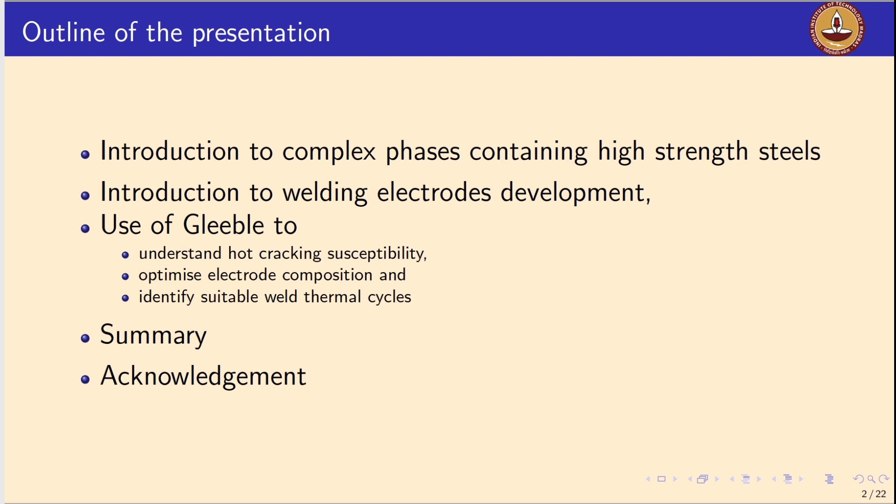So the high-strength steels we are actually discussing here contain an ultimate tensile strength beyond 1 gigapascal, right? And they also possess very good ductility for this strength level, about 10 to 15%, so that these steels can be made into components for applications like armor applications, automotive applications primarily for lightweighting, and shipbuilding. So the unique microstructure that the steel possesses makes these steels very attractive for high strength applications.

So for example, in shipbuilding these steels can be exposed to hydrogen containing environments. So the unique microstructure we see in this slide, the mixture of retained austenite and carbide-free bainite, is also known to have very good resistance against hydrogen, because of the increased interface boundaries as well as the presence of retained austenite, which can also store hydrogen in the microstructure so that the embrittlement can be delayed. So this microstructure becomes very attractive for high strength applications.

Moreover, the carbide-free bainite containing microstructure is also known to have very good ballistic resistance. So therefore, for armor applications, this becomes very interesting. Unfortunately, because of the high carbon containing microstructure, the other alloying elements which are needed to stabilize this structure are extremely important, and they also affect the weldability significantly. So in order to develop good welding electrodes, we need to understand how these alloying elements affect the weldability of the material. So therefore, the physical simulations become very critical, right?

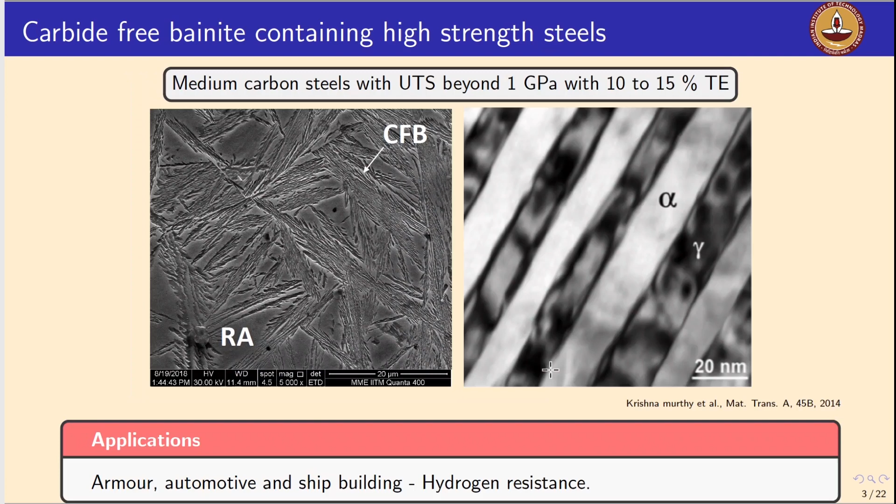So the addition of alloying elements such as silicon and aluminum is very important because these elements are known to suppress carbide precipitation during this bainitic holding. Right. Apart from silicon and aluminum, sometimes we also add phosphorus, because phosphorus can also give very good solid solution strengthening, and it can also suppress cementite formation. So this isothermal holding cycle is extremely important to get the carbide-free bainite containing microstructure. And so we also need to add alloying elements, silicon, aluminum, phosphorus with the carbon, so that we can stabilize retained austenite at about 10 to 15%. So this thermal cycle with alloying element additions is extremely essential to stabilize these microstructures, right?

But if you understand the welding metallurgy, these elements are very notorious for welding, right? The moment you increase these alloying element concentrations, we embrittle the microstructure, and we can also make the microstructure susceptible to hot cracking and cold cracking, and also we can stabilize unwanted phases in the microstructure.

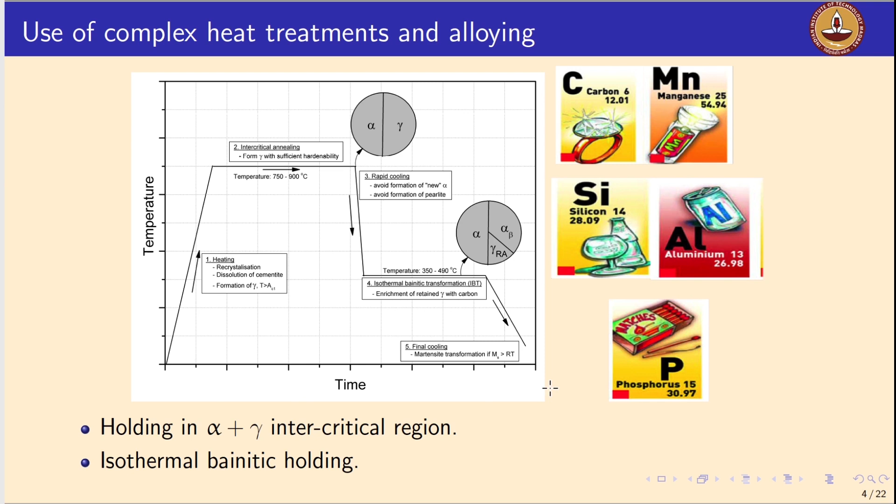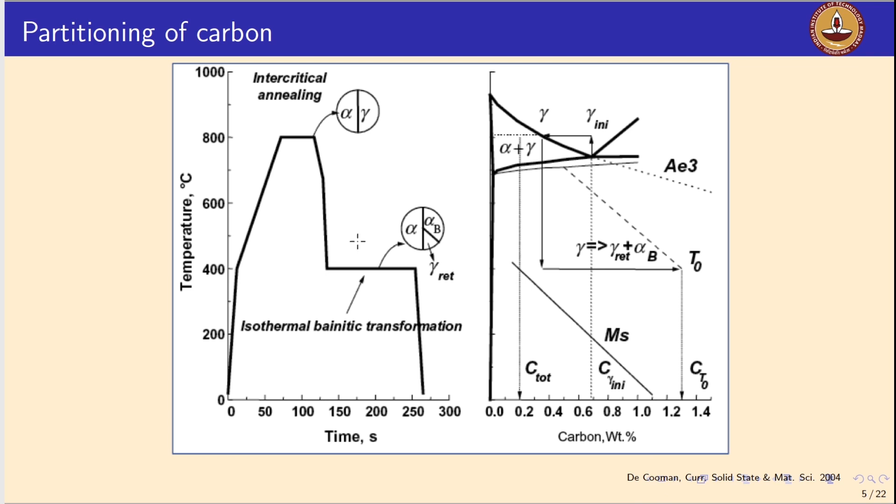So again, the partitioning of carbon is doing the trick to stabilize this CFB microstructure, the carbide-free bainitic microstructure. When we do an isothermal holding, we form the bainite enriched in supersaturated carbon, so that the bainitic ferrite strength can be increased. Subsequently, the suppression of cementite ensures that carbon is partitioned into the austenite, so that austenite can be stabilized when cooling from these bainitic holding temperatures. I don't want to go into detail about the partitioning because of time constraints here. You can also refer to some of the references I quote over here. Right, so the trick here is that the microstructure is stabilized by using this isothermal bainitic holding.

But if you look at a typical weld thermal cycle, we cannot do such a heat treatment, isn't it? Right, because the weld is actually cooled directly from solidification temperature to room temperature. So how do we stabilize this microstructure? What I showed you in earlier slides.

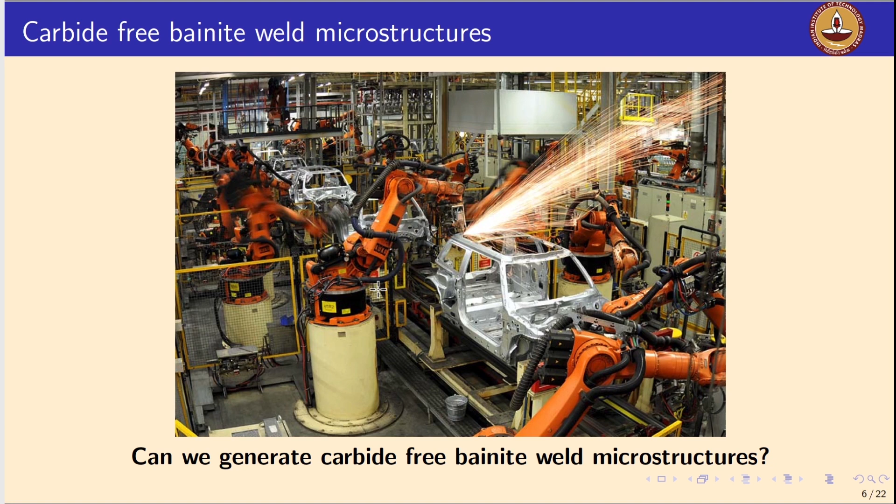So we'll have to play around with the cooling cycles and understand the phase transformation behavior when the weld pool is solidifying from the solidification temperature to room temperature, and whether we can manipulate these weld thermal cycles such that the weld microstructure can contain carbide-free bainite and retained austenite. So that's what I'm going to present in this talk.

So the primary welding processes we use to weld such steels are the flux-based electrode processes, primarily shielded metal arc welding or flux core arc welding. I'm going to present this lecture with respect to the development of electrodes for the shielded metal arc welding process. This process is also known as stick welding because the electrodes are made into a stick, right? So this electrode primarily contains a metal core, and the flux is added onto the surface of the electrode. The alloying elements required in the weld pool are added either into the metal core or in the fluxes in terms of ferroalloys. These fluxes and ferroalloys decompose and produce molten droplets from the melting of the electrode, and subsequently the molten droplets get transferred to the pool, and the weld pool solidifies. Based on the thermal cycle imposed when the weld pool solidifies, we may stabilize the microstructure.

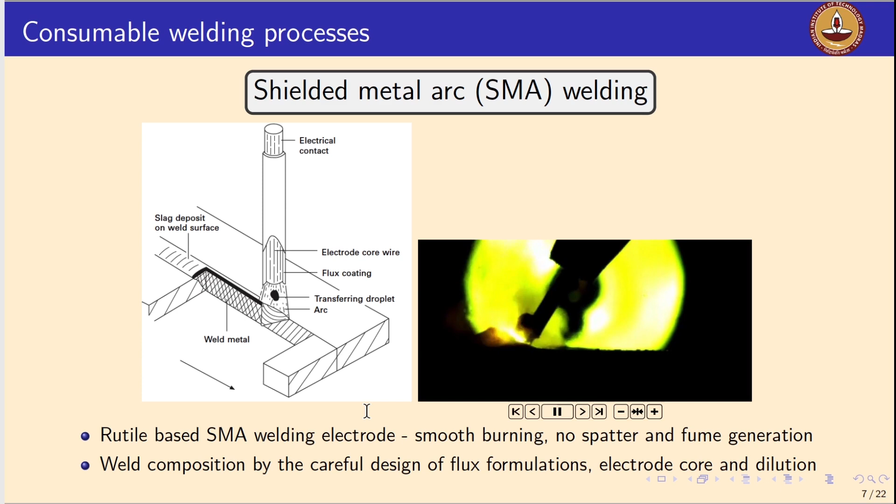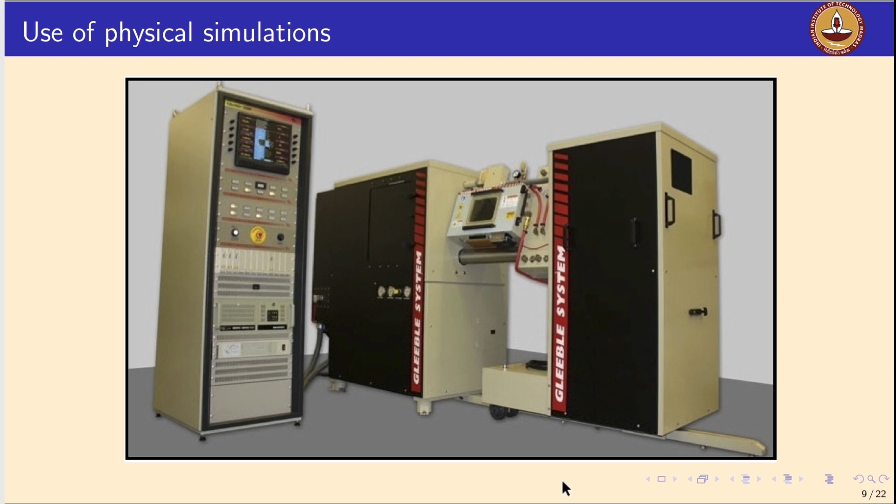So once we make these electrodes and we start producing the candidate welds to generate samples for the physical simulations, because immediately when we start depositing the welds, the welding thermal cycles are not optimized, right? So we generate the candidate welds, and subsequently we extract the samples from the candidate welds and carry out extensive physical simulation using Gleeble. Right. So the first simulation we carry out from the candidate chemistries is to understand the hot cracking susceptibility.

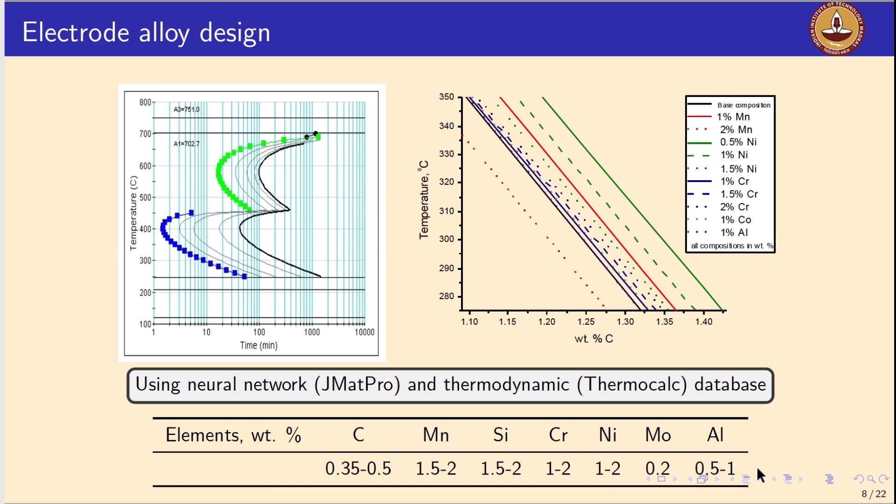Because if you look at the chemistries I showed you in earlier slides, this contains carbon of about 0.35 to 0.5. So if it is 0.4% carbon, the material is already highly susceptible to hot cracking. And apart from the carbon, we also have high manganese and chromium, for example, and some amount of phosphorus and sulfur as well from the fluxes we add. And those chemistries are notorious for hot cracking. So if you don't control the alloying elements in the weld, we end up just producing a cracked weld.

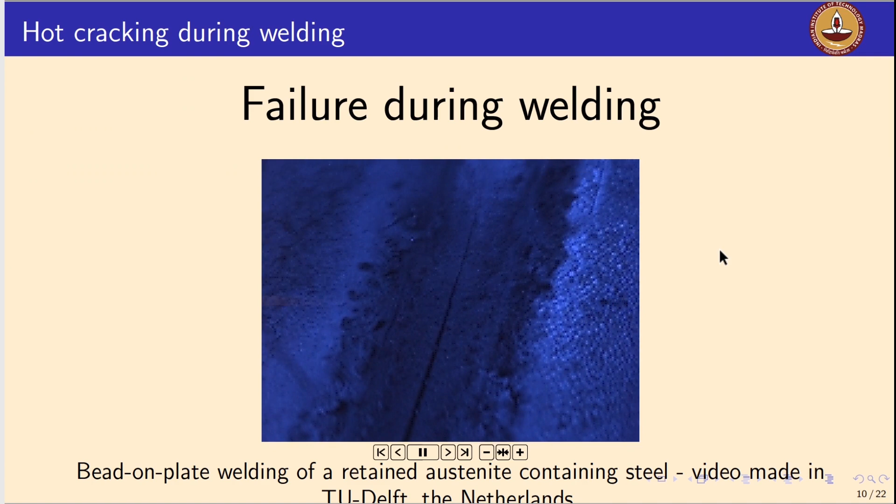So therefore, we have to identify, with the identified chemistries, what compositions can give us welds without any hot cracks, right? So how do we understand the hot cracking susceptibility? We can look at the in situ microstructure during solidification, right? We can also use laser confocal microscopy, where we can visualize the solidification of the weld pool. This is a very expensive affair, right? There we can see the actual solidification of the weld pool and see whether backfilling is happening during solidification, where the liquid can backfill and arrest the crack.

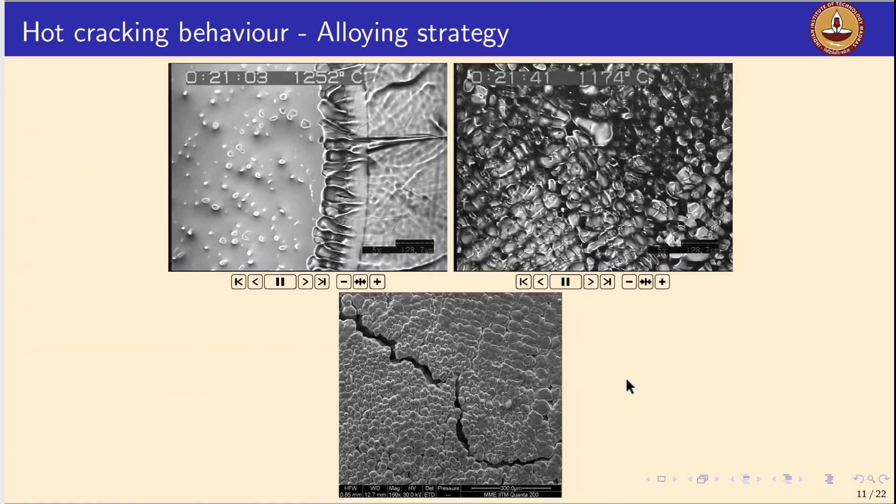Right, and subsequently, when we do in situ studies, we can also see the crack formation live by these high temperature microscopes. Right, as I said, this is a very expensive affair, so we need to have proper equipment, right? And it is also very challenging to visualize the microstructure during solidification at the very high temperatures of this weld. So the best is to have the susceptibility measured using Gleeble, isn't it? So to understand the hot cracking susceptibility for the candidate chemistries, we carry out hot ductility tests. Right, this is one of the best methods to understand hot cracking susceptibility.

Right, so we take the samples from the candidate chemistries and we identify hot ductility as a function of temperature. Right, three important temperatures we have to identify. The first is the nil ductility temperature, the temperature at which the material loses its ductility completely. And then subsequently, by increasing temperature stepwise, we can also identify the temperature at which the material loses its strength as well. So the difference between NDT and NST can give us an indication about whether liquation phenomena are predominant when the material is heated up to various temperatures during welding. And subsequently, when we start cooling the weld and do the testing as a function of cooling temperature, we can identify the ductility recovery temperature, the DRT.

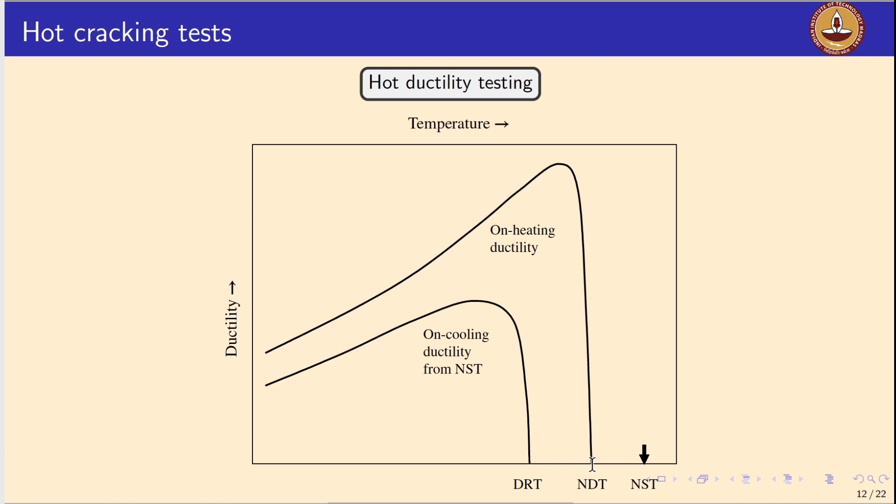Again, they are indicative of the solidification range over which the weld is cooling and then solidifying completely into a solid structure. So if the difference between the NST and DRT is larger, then we can say that the material is solidifying over a larger range. So the solidification cracking susceptibility temperature range would be larger. Therefore, the material can be susceptible to hot cracking during cooling. So the difference between these temperatures gives us a good indication of the hot cracking susceptibility of the material. So once we identify the candidate chemistries, we carry out extensive hot cracking tests using Gleeble hot ductility testing, right? Then we can optimize the chemistries based on these hot cracking susceptibility tests.

But with the optimization of the chemistries, the candidate chemistries can be tuned such that the temperature range between the NDT, NST, and DRT can be reduced significantly. This was carried out on all-weld carbide-free bainite welds from one of our colleagues, and it clearly shows that by carefully modifying the chemistries, we can reduce the hot cracking susceptibility very well.

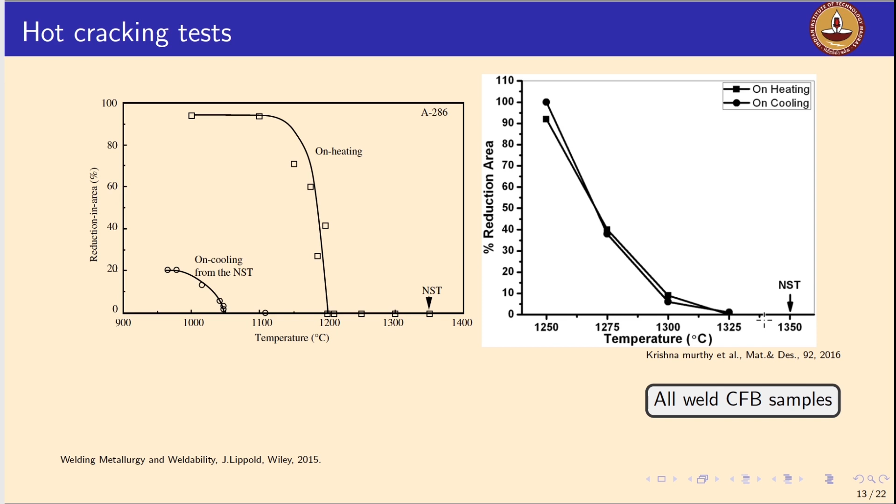So Gleeble helps us to understand the hot cracking susceptibility, and by carefully tuning the chemistries, we can also identify which chemistry has the least susceptibility to hot cracking. So once we get past the hot cracking susceptibility problem, right, the next step is to identify the actual weld thermal cycle.

So the weld thermal cycle here means identifying the interpass temperatures, the temperature at which the second pass is deposited on the first pass. The interpass temperature is one of the important parameters because it lets the first pass weld transform at isothermal bainitic temperatures. Upon maintaining the interpass temperatures, once the welding is carried out, we also have to maintain the entire weld at an isothermal holding temperature so that the weld can transform into a completely carbide-free bainite containing microstructure.

So how do we identify these temperatures? Right, I showed you in the earlier graphs. The CFB microstructure is stabilized by using an isothermal holding, right? So once we optimize the chemistries, we take samples from all the welds and carry out extensive dilatometry analysis. The purpose of dilatometry analysis is to identify the interpass temperatures and the post-weld isothermal holding time and temperature, right?

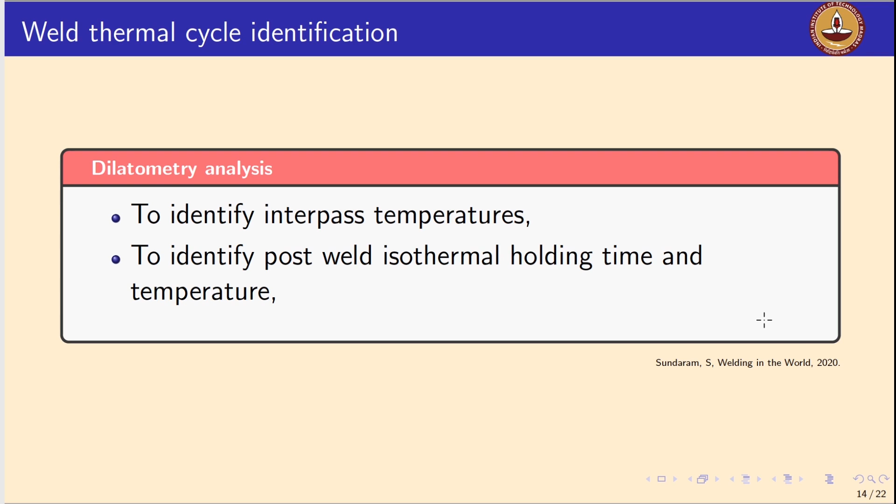From the hot cracking susceptibility, we can identify the possible chemistries subsequent to the hot cracking test. I'm showing you three chemistries which are optimized in this case, based on the CCT and subsequently the hot cracking test. We identify these three chemistries, and then we actually make weld deposits using them. We take samples from these multipass welds for Gleeble simulations to understand the phase transformations, and subject them to various dilatometry analyses. I'm just going to show you a case study for these chemistries.

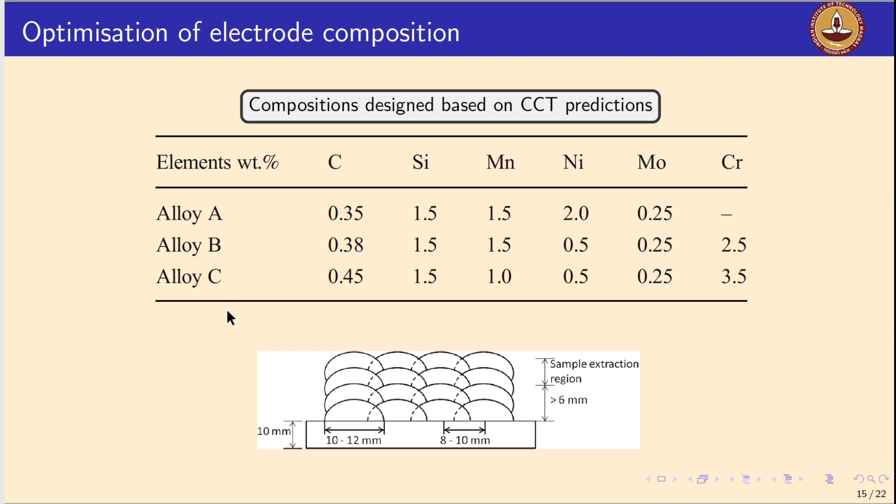How do we optimize the interpass temperatures and subsequent isothermal bainitic holding time and temperatures when we do post-weld heat treatment? Based on the chemistries, we can carry out the dilatometry analysis to understand what temperature we have to hold at between the passes and during post-weld heat treatment. So, three chemistries I show you: alloy A, alloy B, alloy C. You don't need to worry about the actual chemistries. We just assume that we are going to see three steels: alloy A, alloy B, and alloy C.

Right, alloy A. We can identify suitable isothermal bainitic holding temperatures, and we can vary the temperatures and identify the transformation kinetics using the dilatometry analysis. The important condition to generate a carbide-free bainitic microstructure is that the final microstructure should not contain any martensite. If martensite is present, the structure becomes brittle and susceptible to hydrogen-induced cold cracking. We should also understand that the holding temperatures should always be above the MS temperature. Therefore, we carry out extensive dilatometry analysis by first understanding the martensite start temperature, MS, and what would be the ideal isothermal bainitic holding temperatures.

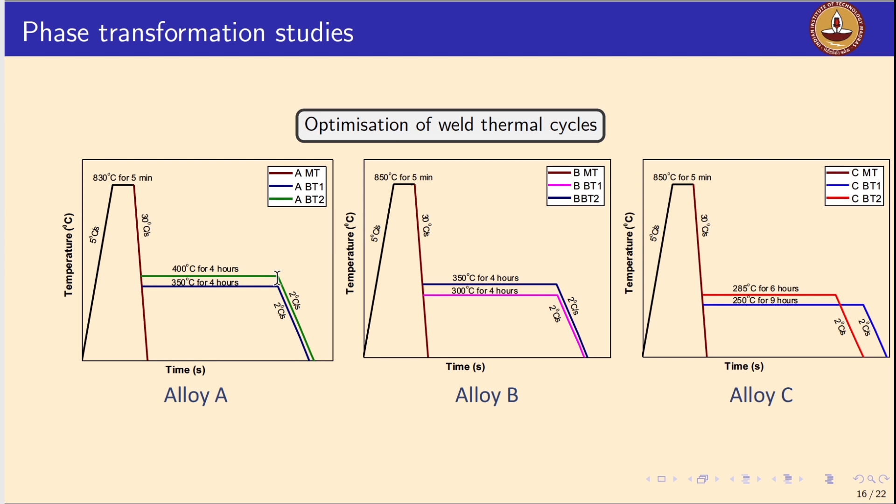Right. So we carry out extensive experiments at various temperatures. I'm just showing you two such isothermal bainitic holding conditions, to give an idea of how changes in these holding temperatures can change the microstructure, and how we can optimize it. We can now understand the exercise of optimizing the interpass temperatures and the post-weld isothermal bainitic holding temperatures by looking at these three conditions. To make the presentation clear, we assume three conditions: alloy A, the complete martensite transformation, and bainitic holding 1, bainitic holding 2, similarly for alloy B and alloy C.

If you look at alloy A, we need to first identify the martensite start temperature, MS, right? We have to ensure that the isothermal bainitic holding is always above the MS temperature. The important condition, as I told you, is that whatever temperature we are holding at, and on subsequent cooling to room temperature, it should not transform to martensite. Unfortunately, with alloy A, whatever isothermal bainitic holding we used in the thermal cycle, we always found some martensite transformation, right?

Unfortunately, for alloy A, you see here 350 and 400. In both cases, when we hold at these temperatures, subsequent cooling led to martensite formation. The other important criterion when we are carrying out the dilatometry analysis is the time of transformation. We cannot keep on holding the weld for infinite time, right? We'll have to achieve a complete bainite transformation in a shorter duration, so that the weld can be taken out or the next pass can be deposited.

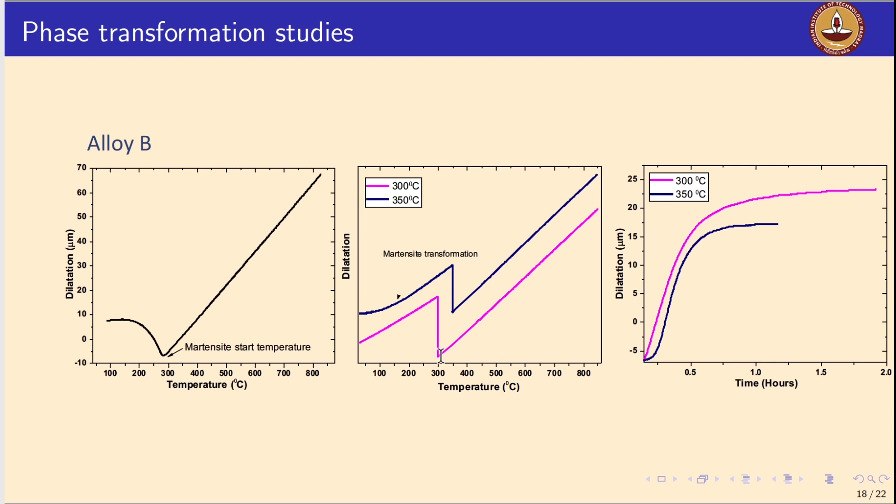So we have now chosen the best weld thermal cycles in all three chemistries, alloy A BT1, alloy B BT1, for example. The thermal cycle is what I show over here: cooling the welds until 300 degrees centigrade, then holding isothermally for about an hour, and subsequently cooling the weld to room temperature. By maintaining a 300 degrees centigrade interpass temperature, we can also attain the microstructure containing carbide-free bainite and retained austenite. And the microstructure looks very good, very promising, what we obtained.

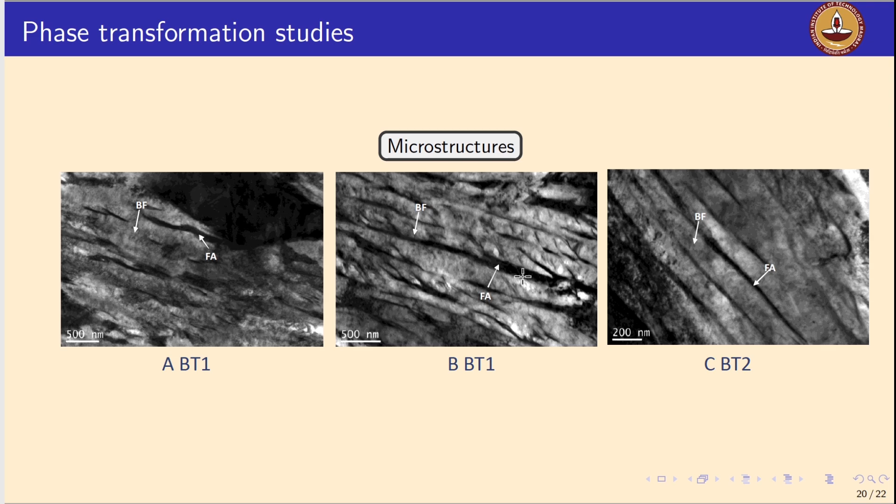And subsequently, once we identify these isothermal bainitic holding temperatures and time, we can make the welds and study the mechanical properties again using Gleeble. So we take the weld samples, we use Gleeble compressive tests to identify the mechanical properties. If you look at the three optimized weld thermal cycles, they produce excellent mechanical properties.

So the steel B, which doesn't have any martensitic structure at all, showed a very good elongation in compression, right? And the yield stress is much higher than what even the base material has, about 1,700 megapascal in compression. And so all these three steels exhibited 1.5 gigapascal or above.

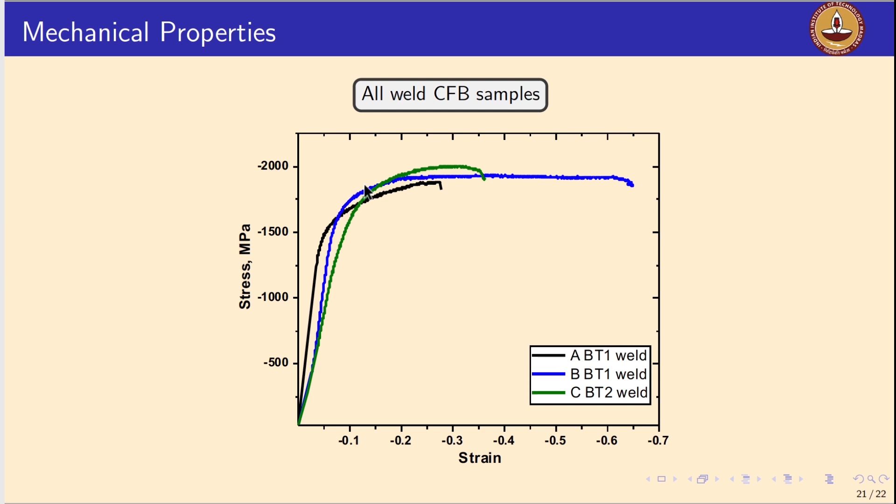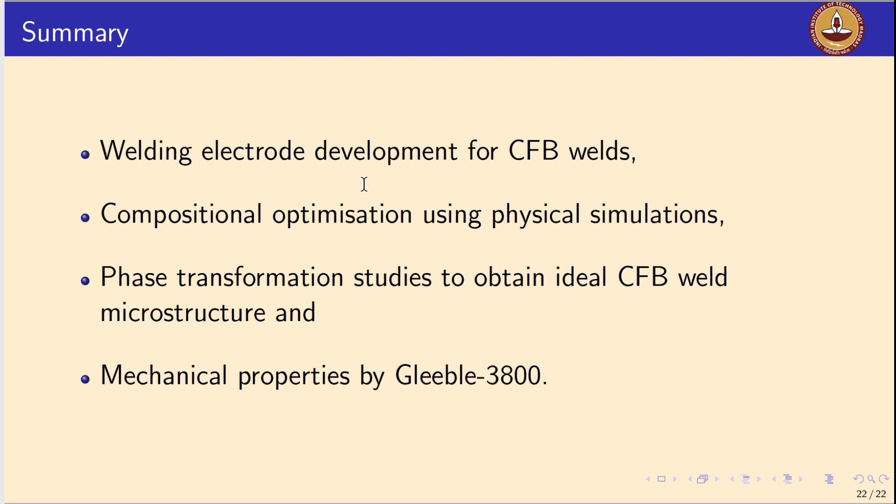Right, so the mechanical properties we achieved using this exercise are much better than the base material in welds. Right, so we made welds, and the carbide-free bainitic containing microstructures are welded using these electrodes, which we actually optimized from the study, right? So they even showed much better properties than the welds made using austenitic filler.

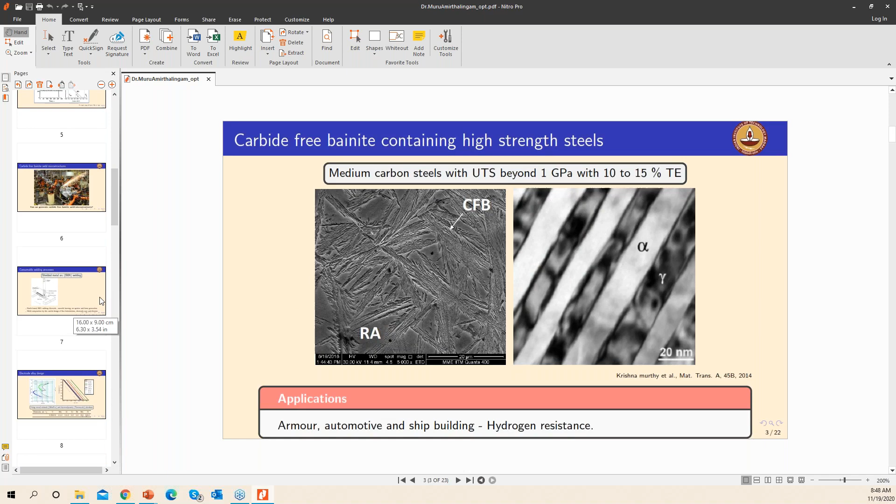So the identification of the holding temperature is very critical. We hold it at isothermal bainitic holding, and then we deposit the next pass. After depositing the next pass, again, the weld is not cooled to room temperature. We maintain it at that temperature. When all the passes are completed, we can shift the entire weld into a furnace immediately at the same temperature. So the interpass temperatures and the post-weld heat treatment holding temperatures are all the same. If you identify 400 as the isothermal bainitic holding temperature, we have to maintain 400, and the weld should never cool to room temperature straight from, for example, solidification. We always maintain it at 400 degrees centigrade. So that's what we meant about both the interpass temperatures and the isothermal bainitic holding temperatures.

Thank you. We have a couple more questions, and unless some more come in, maybe these will be our final questions. It says the weld material is very interesting. How can we make such steel as a base material by conventional thermomechanical processing, followed by cold rolling and annealing?